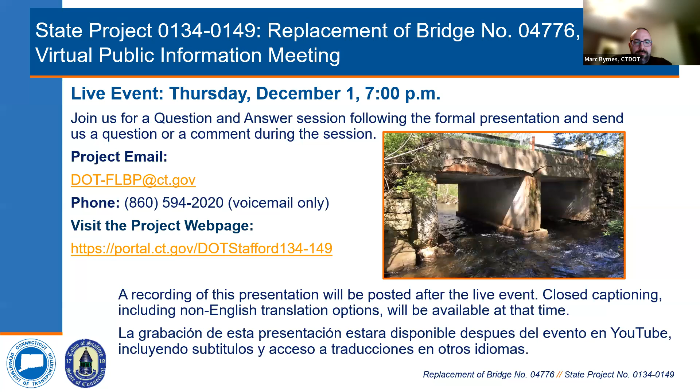My name is Marc Byrnes. I'm the project manager for the local bridge program for the Department of Transportation, and my contact information is as shown.

The goals for tonight's meeting are to interact with the project team, explain the federal local bridge program's Design Managed by State, or DMS, program. We will also take welcoming remarks from the first selectman of the town of Stafford, followed by introductions of the project team, a formal presentation of the design progress, and after that, an open forum for questions and answers.

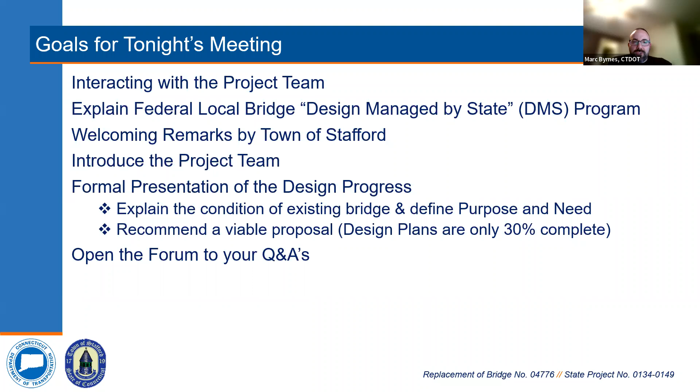If you would like to reach out to us, you can send us an email at dot-flbp@ct.gov, by phone at 860-594-2020, which will be a voicemail, or through the Zoom Q&A chat, which will be available through this presentation. Again, you can view the project webpage at portal.ct.gov/DOT Stafford 134-149. The comment period will be open through December 15th, 2022.

I have to read this slide on Title VI, Civil Rights. No person shall, on the basis of race, color, or national origin, be excluded from participation or subject to discrimination in the development of this project.

We encourage you to fill out the voluntary post-meeting survey, which is also on the project webpage, and you can also reach any civil rights information at the web address above. A recording of the formal presentation will be posted on YouTube after the live event, which will also include closed captioning, including non-English translation options.

The project will be funded through the federal local bridge program in the Design Managed by State, or DMS, program. Traditionally, under the federal local bridge program, the town would solicit for a designer, and the funding split would be 80% federal with 20% town funds for design, rights of way, and construction. Through the DMS program, design, rights of way, and construction phases are funded with 80% federal and 20% state funds, with no cost to the town for any phase of the project.

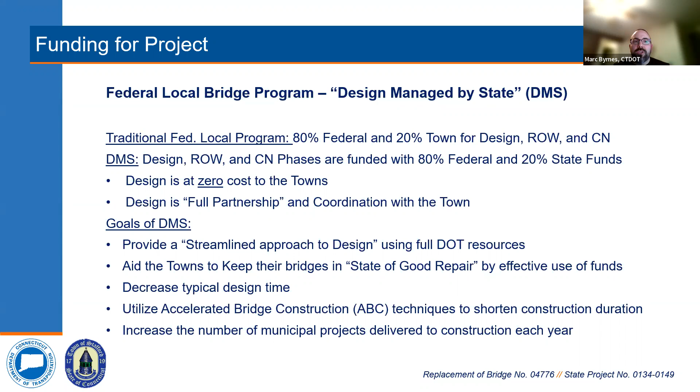I'll now turn it over to the first selectman of the town of Stafford to provide some opening remarks.

Thanks, Mark. My name is Sal Titus, I'm the first selectman here in Stafford. I'd like to thank everyone for participating in today's public information meeting for the Hydeville Road Bridge. I'd like to thank folks at CHA companies and Connecticut DOT for their hard work designing and administering this bridge replacement project, as well as our staff in the Department of Public Works for continuing the work on improving our aging infrastructure.

Please ensure that you communicate any questions or concerns regarding this project to us. This is your opportunity to get your questions answered. They will forward your questions to the appropriate parties during the comment period. At this time, I'll turn the presentation back over to Mark from Connecticut DOT.

Thank you, Sal. I will also now introduce our project team. From the Department of Transportation, our division chief is Bart Sweeney, our principal engineer is Derek Lassard, and as I said, my name is Marc Byrnes. To my right is James Barros, project engineer. From the Office of Rights of Way is Zachary Garano. And then from Clough Harbor Associates, or CHA, is Anand Seshadri and Rob Bahler.

I'll now quickly run through the basic elements of a bridge. As you can see on the slide above, the deck is the traveling surface where pedestrians and vehicles will travel. Adjacent to the deck is the parapet, which protects vehicles and pedestrians from falling over into the hazards below. Below the deck is the bridge superstructure, which carries the vehicular and pedestrian loads through steel beams or concrete beams or different types of beams.

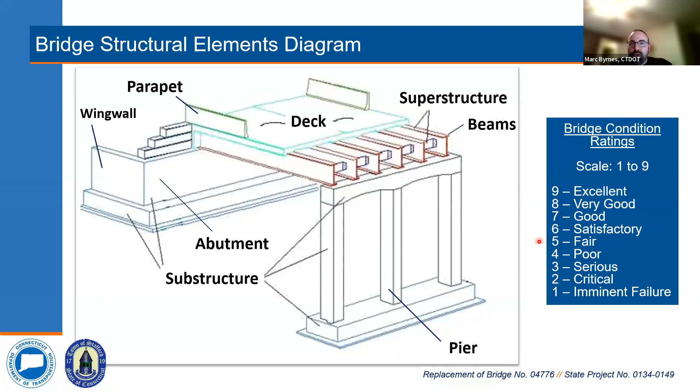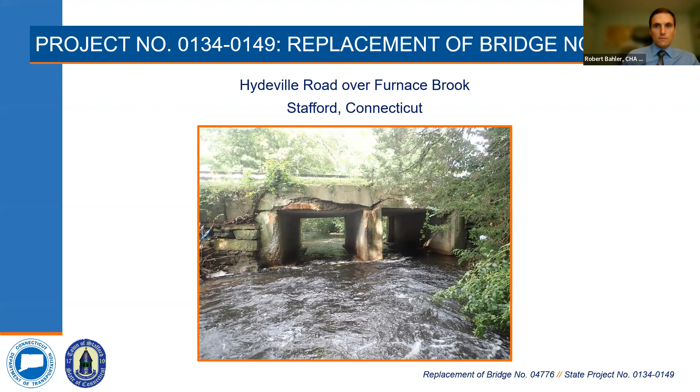Thanks, Mark. Good evening, everyone. I'm Rob Bahler with CHA. As Mark mentioned, this presentation is in regard to project 134-149. This is for the replacement of bridge number 4776. This bridge carries Hydeville Road over Furnace Brook and is in the town of Stafford.

Showing here is the project location map. The bridge is circled there in the center where Hydeville Road crosses Furnace Brook. Hydeville Road runs north to south through the project location, and Furnace Brook runs from east to west. Just to the south of the bridge is East Street or Route 19, and just to the east of the bridge is Hydeville Pond, which is retained by Hydeville Dam.

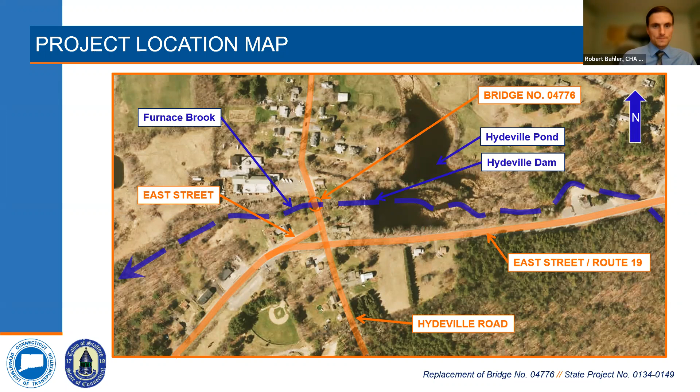Shown here is some existing bridge data. Looking at the plan, north is oriented to the right, so here the roadway is aligned horizontally on the page. The bridge carries Hydeville Road in the north-south direction, 2 lanes of traffic, 1 lane in each direction. The roadway is 21 feet wide from curb to curb.

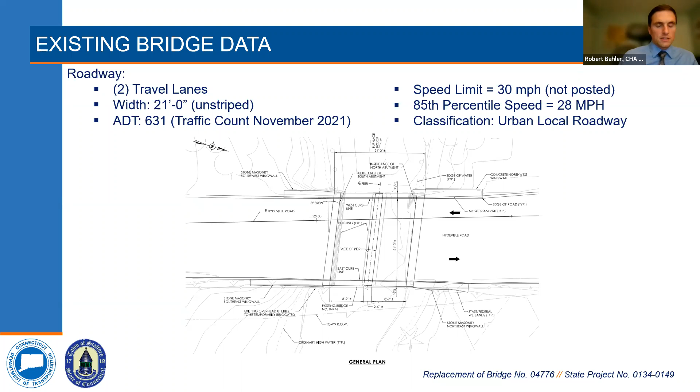The average daily traffic across the bridge is about 630 vehicles per day. The speed limit through this area of the road, although it's not posted, is 30 miles an hour, and the 85th percentile speed is 28 miles per hour. The roadway is classified as urban local roadway.

A little bit more information on the existing structure. The bridge was constructed in 1935, so that makes it about 87 years old. The bridge is a 2-span structure, so each span is about 9 feet long with a total structure length of 24 feet. The bridge is comprised of concrete elements.

The superstructure is a concrete slab, which is supported by the 2 abutments, one at the north end and one at the south end of the bridge, both constructed of concrete, and also the center pier. All of these substructure elements are founded on concrete footings, and there's also an invert slab along each channel underneath the stream bed.

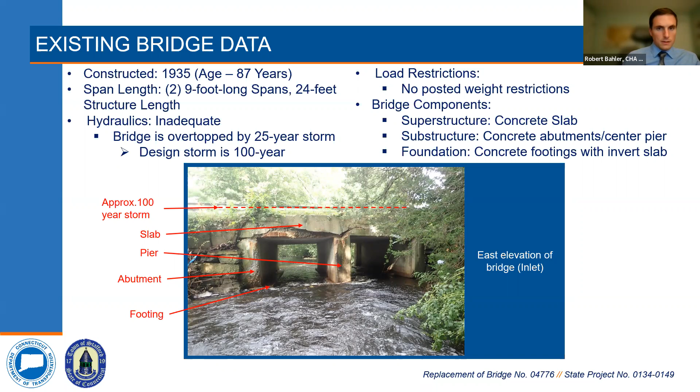In regard to the existing conditions of the bridge, based on the recent bridge inspection report from August of last year, each element of the bridge is rated on a scale of 1 to 9, as Mark mentioned earlier. The deck is rated in fair condition at a 5. The approach roadway is rated in satisfactory condition. Both the superstructure and the substructure are rated poor, rated at a 4.

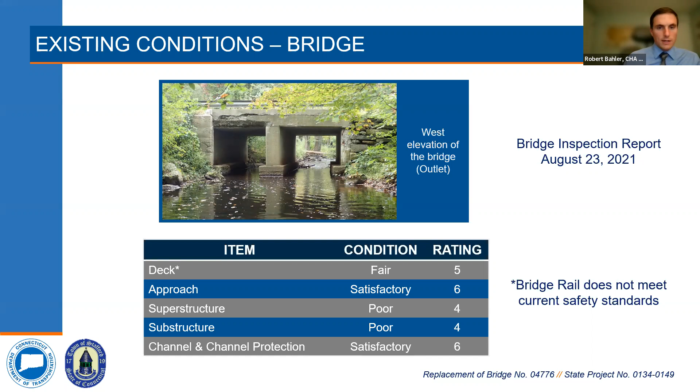The channel and channel protection are in satisfactory condition. One other thing I wanted to note, the bridge rail, which is a part of the deck rating, does not meet current safety standards.

Let's go through a couple pictures of the existing structure. Starting at the top left is the downstream elevation on the west side of the bridge. Photo to the right of that is the upstream elevation, the east side of the structure. The lower left photo is looking over the bridge to the north. Just to note, on the east side of the bridge is overhead utilities, and there is guide rail along both sides of the road.

Photo on the lower right is looking south over the bridge. Wanted to note here that there's a couple of driveways, one on either side of the roadway, that are pretty close to the bridge.

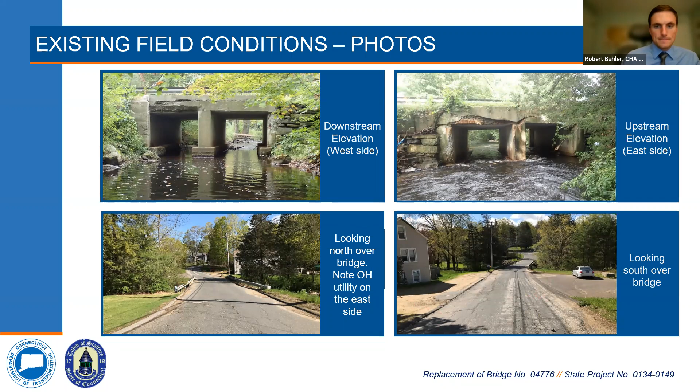Again, starting in the top left, there's a photo of the pavement condition. You can see some cracking and some patching of the existing pavement. Photo to the right of that shows the bridge rail and the concrete curb. The bridge rail post is rusted away from the concrete curb, and there's some concrete deterioration on the curb. The two lower photos show the west fascia and the east fascia of the existing bridge. As you can see, there's significant concrete deterioration on both of these, and this is what's driving the poor condition rating of the superstructure.

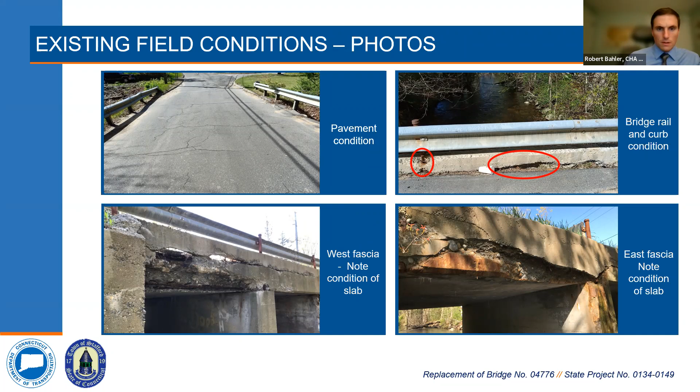Starting at the top left again, it's a picture of the underside of span 1. You can see there's some efflorescence there, which is the white spotting. To the right of that, you can see the south abutment and the pier, also span 1. The footings of both the pier and the abutment are exposed.

Photo to the lower left, that's a picture of the south abutment. You can see there's some concrete deterioration there as well, driving the poor condition rating of the substructure. You can also see the southwest stone masonry wing wall there. Photo to the lower right is at the northeast corner. There's a portion of the footing at that abutment where the footing is missing and it's undermined. You can also see there's rainwater spilling over the wing wall, indicating there's some poor drainage conditions up above on the roadway.

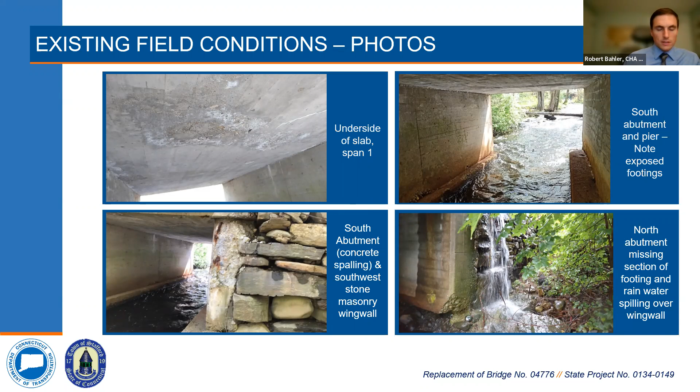On the top left is a photo of one of the wing walls, a typical condition. The wing walls are stone masonry, except for the northwest wing wall, which is built out of reinforced concrete. The photo to the right shows the Hydeville Dam, just east of the bridge, about 250 feet away. The photos on the lower left and lower right are the upstream and downstream channels, respectively.

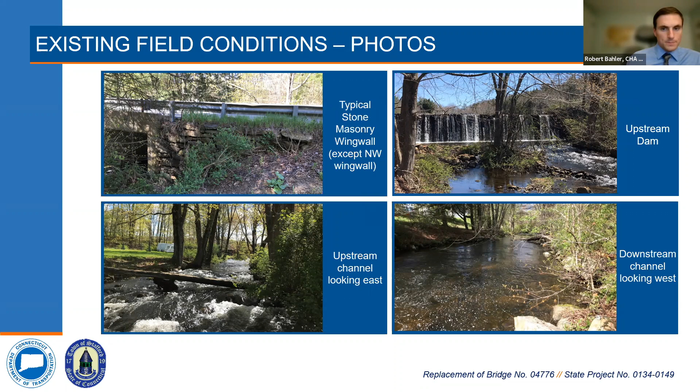That brings us to the project purpose and need. As I mentioned before, the bridge is 87 years old, so it's starting to show its age. It was built in 1935. The superstructure and the substructure are rated in poor condition.

All the footings are exposed at all the substructure elements, and the north abutment footing is missing and undermined in a portion of it. The existing 21-foot roadway width does not meet either federal or state standards, so we look to improve that. The bridge and approach rail systems do not meet current safety standards. There's an unknown load rating capacity, and as mentioned before, there's inadequate hydraulic performance where the 25-year storm overtops the roadway. This is going to govern the direction of the project.

What we propose here today is a full replacement of the bridge. I also want to note that despite the deficiencies we've talked about, the bridge is still safe for the traveling public, and it is routinely inspected by Connecticut DOT.

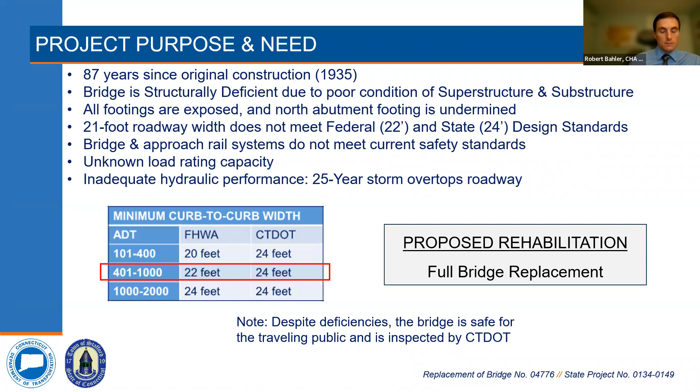Proposed improvements we'd like to focus on as part of the full bridge replacement: we'd like to provide a structure with a 75-year service life that also requires minimal maintenance. We propose a 24-foot wide roadway realigned slightly to the west, which I'll get into later. We'd also propose a crash-tested open bridge rail system along both sides of the roadway across the bridge, and improve hydraulic performance without having any floodway impacts.

This bridge is located in a FEMA floodplain zone. We'd also like to accomplish bridge replacement quickly, so that community impacts are minimized, and also improve aesthetics by using concrete form liner facing and bridge rails.

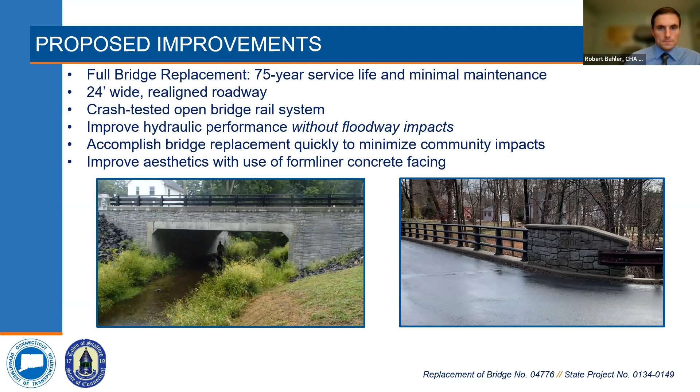The bridge we're proposing is, again, 24-foot wide curb to curb width, and it's a twin box culvert, so the two box culverts will have a span length of 16 feet each.

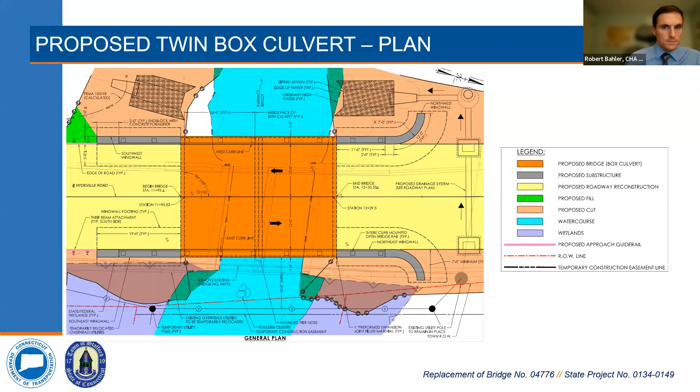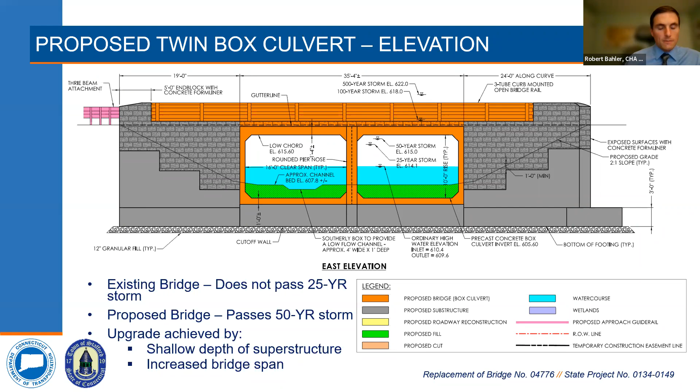Below that is the actual twin box culverts that we're proposing. We're proposing those as precast, so those will be set in place by a crane to reduce the duration of construction, and then those will be constructed on top of cutoff walls and return walls, shown in gray there.

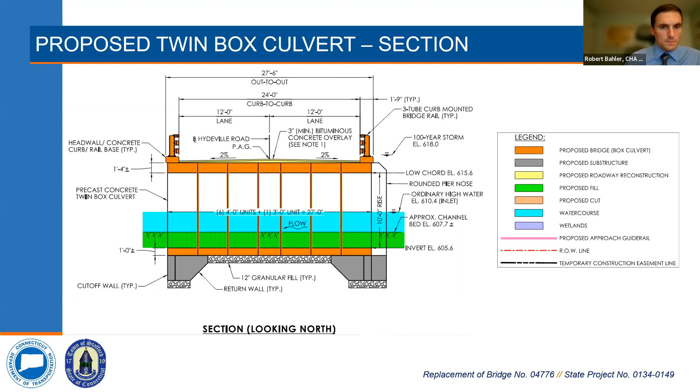We're proposing to realign the roadway slightly to the west, about 5 feet. That will improve the horizontal alignment of the roadway and also move the roadway a little further away from the town right-of-way and private properties to reduce impacts there.

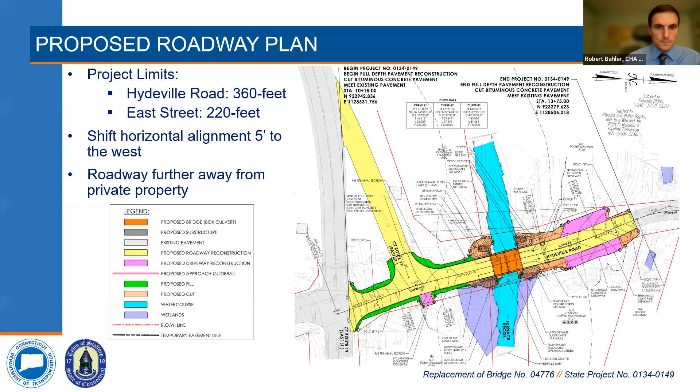As I mentioned before, the existing 25-year storm doesn't pass, it overtops the roadway. In the proposed bridge, the 50-year storm will pass underneath the structure without overtopping.

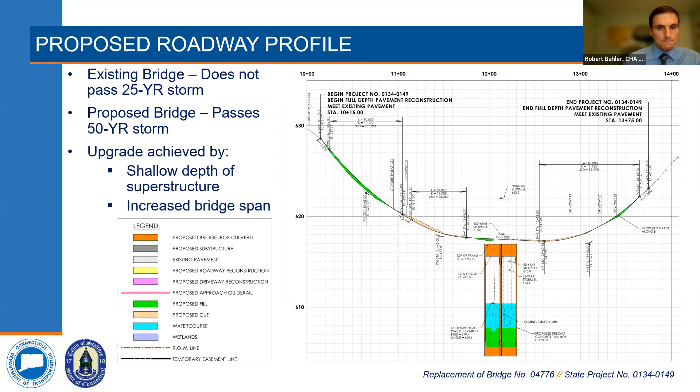So the detour would travel along Upper Road to the west and then connect in with Leonard Road, go south, and then back east on East Street or Route 19 back to the project location. The detour is about 2.4 miles long. It's about a 6-minute detour.

The reason we want to do this is it creates a safe work zone for the contractor and the residents, and then it also will help shorten the construction duration.

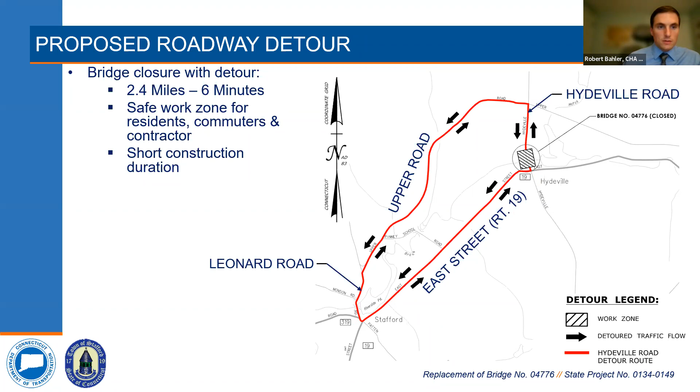Those will have to be temporarily relocated further to the east. And then after construction, they'll be relocated back to their approximate location.

As I mentioned before, on the north side of the bridge, we'll be adding a drainage system. And then there's an existing drainage system on the south side that we'll be modifying.

As far as environmental impacts, we're anticipating some tree clearing along both sides of the roadway. And there will be temporary and permanent wetland and watercourse impacts due to the bridge replacement.

The permits we're anticipating at this point are a Town of Stafford inland wetland permit, a flood management certification, an Army Corps pre-construction notification, and a Connecticut DEEP pre-construction notification.

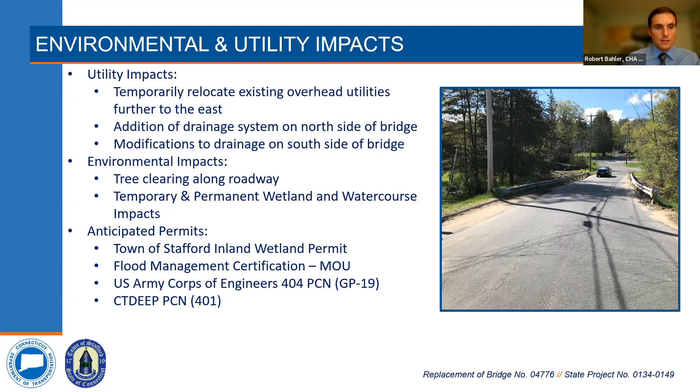The reason we need those would be for providing the contractor access to the project area, and giving him the space to work.

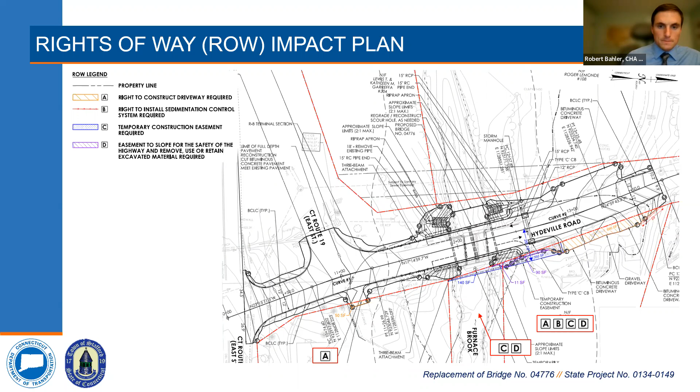At this point, I am going to turn it over to Zach from Connecticut DOT Rights of Way to go through the acquisition process. Thanks, Rob.

Like Rob said, my name is Zachary Guarino. I'm the project coordinator with the department's Division of Rights of Way. Our office is responsible for acquiring the property rights needed for transportation projects. The proposed project design requires acquisition of property rights, so I'd like to give a brief overview of the department's right-of-way acquisition process.

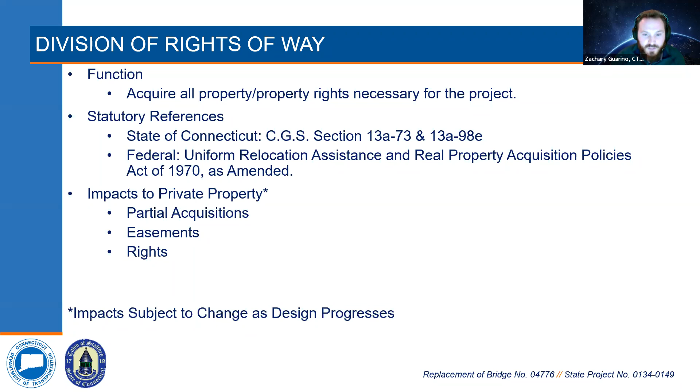Please keep in mind that the specific impacts are still being finalized and may change as the design progresses. Any required property rights will be acquired in accordance with Connecticut General Statutes sections 13a-73 and 13a-98e. When there is federal money used in any aspect of a project, the department must adhere to the Uniform Act.

Once the design has progressed to the point where we are ready to begin the acquisition process, each affected property owner will receive a formal letter of intent to acquire from our office, along with a property map which depicts the exact property rights to be acquired.

At that point, our office will determine the fair market value of those property rights and use that value to establish an offer of just compensation. That offer will be sent to the property owner in writing, and a right-of-way agent will be available to meet with the property owner, explain the project, go over the specific impact to their property, and explain the state's offer.

The property owner will have a reasonable time, typically 30 days, to consider the state's offer and enter negotiations. When an agreement is reached, the department will prepare all the necessary paperwork to record the deed and property map on the town land records.

However, if agreement cannot be reached, in order to keep on schedule, the department may acquire the necessary property rights through its power of eminent domain. In that event, the state files a notice of condemnation in the Superior Court, along with a monetary deposit in the amount of the state's offer.

The owner would have 6 months from that date to file an appeal if they felt that the state's offer was inadequate. Whether or not the owner chooses to appeal, the money deposited in the court is available to be withdrawn by the owner. It's important to note that the state only acquires property rights that are needed for the project. If there are any questions specifically related to the right-of-way process, I'd be happy to address them after the presentation. Thank you, hand it back to Rob.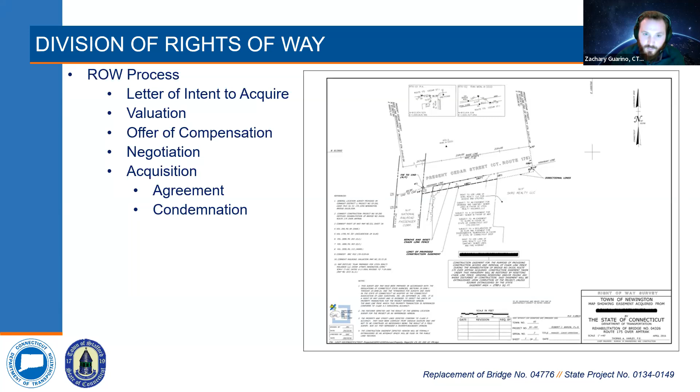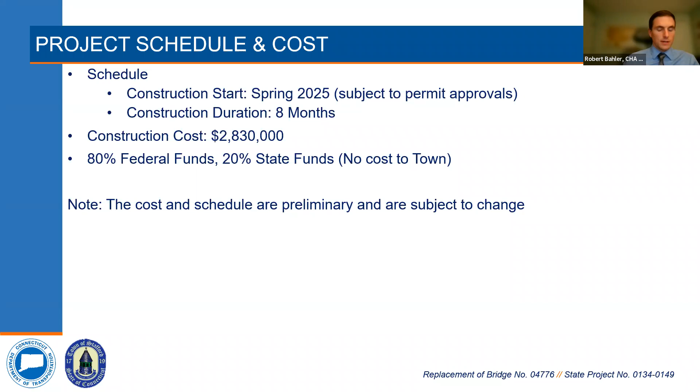And as Mark mentioned early on in the presentation, the project will be covered by 80% federal funds and 20% state funds, so there's no cost to the town here. Keep in mind, this is a preliminary cost and schedule, and these are subject to change based on final design and permit approvals. I'll turn it back to Mark at this point to facilitate question and answers.